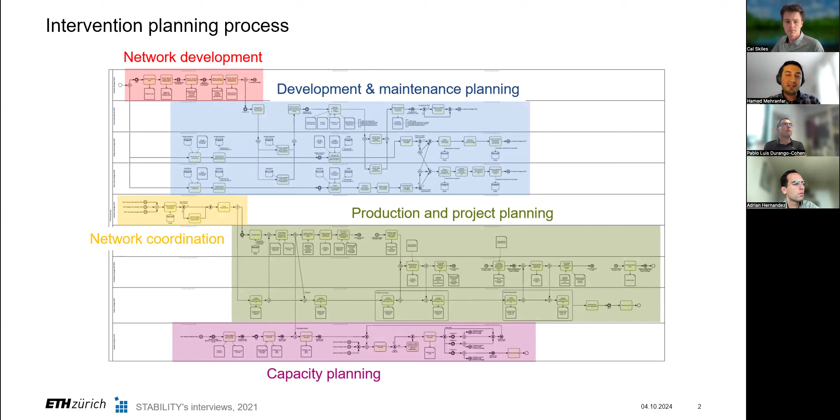So the suggestion would be something like this. You see the optimal composition, and you see, okay, at this point, I need to do this thing. And it's on purpose that I put it below so that you can see how you situate it over time. Different reads can be done from this, depending on the stakeholder.

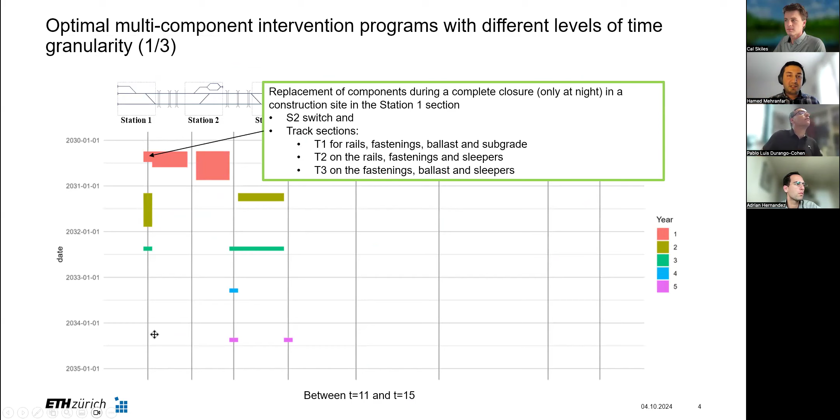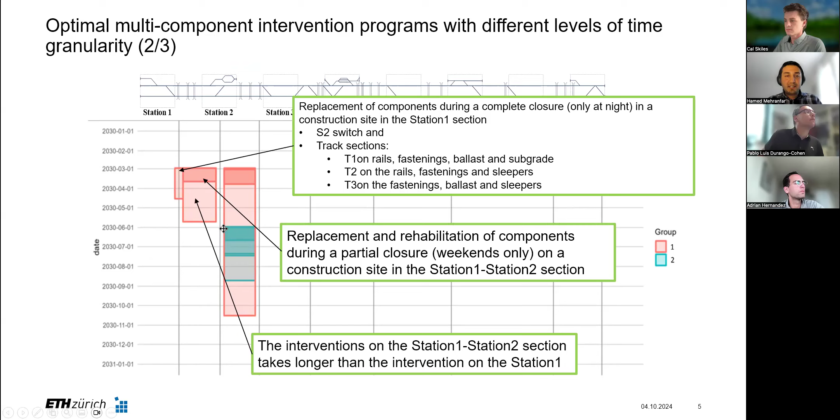For example, if you are a higher level manager, you might just want to know the spatial temporal overview of this intervention. You can zoom more in and see, okay, between this station, this kind of intervention needs to be done. Or you can even zoom more in and have it overlaid with the timetable, and then see where my closures are, what the services are here, and how they impact this. So we wanted to provide these things as efficiently as possible so that this kind of decision can be made fast.

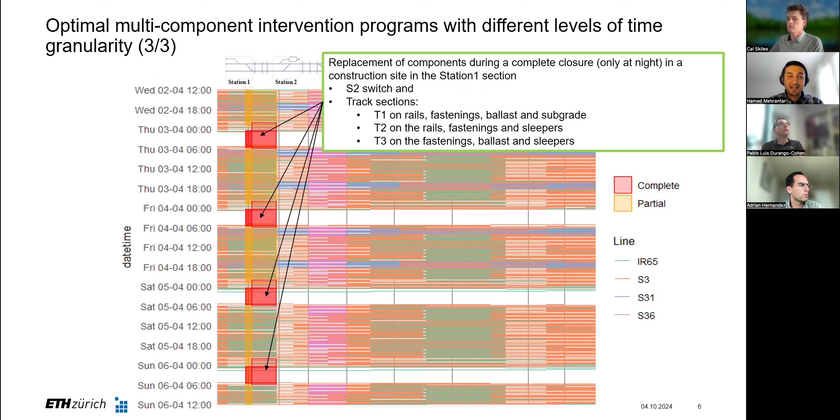So to give you a sense of what kind of information these decision makers deal with, these are, for example, results of the analysis from engineering offices. For example, they can say, okay, for this bridge, for its abutment, we need a rehabilitation that takes roughly 2 weeks, of which for 1 week it impacts traffic, and it more or less costs this much. So you have these things, you know where they are located, and this kind of decision can be made.

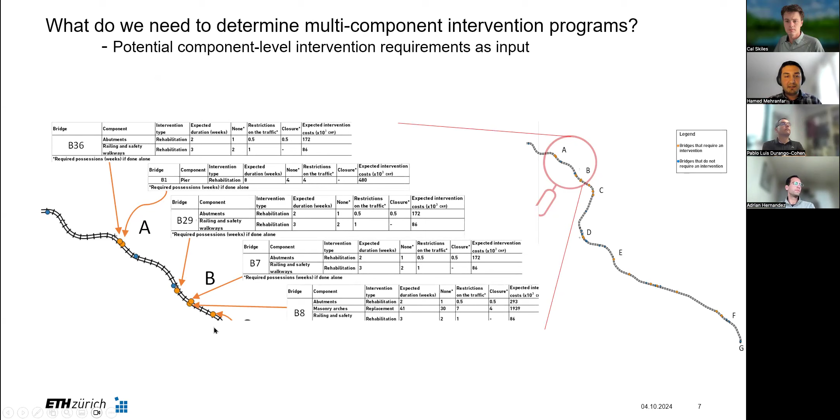So we wanted to be as close as possible to the way these managers think, and we wanted to make our cost function depending on that. So we consider our cost as owner cost, basically the intervention cost for the material and crew, traffic management costs for establishing the rerouting or shuttle buses, and service disruption costs that we counted as added travel time.

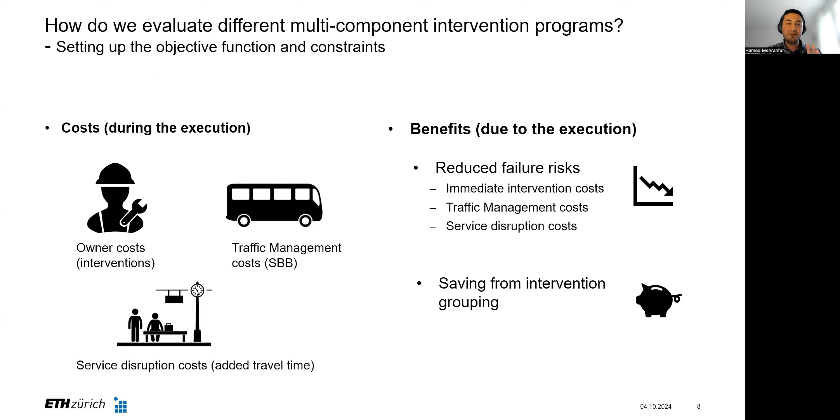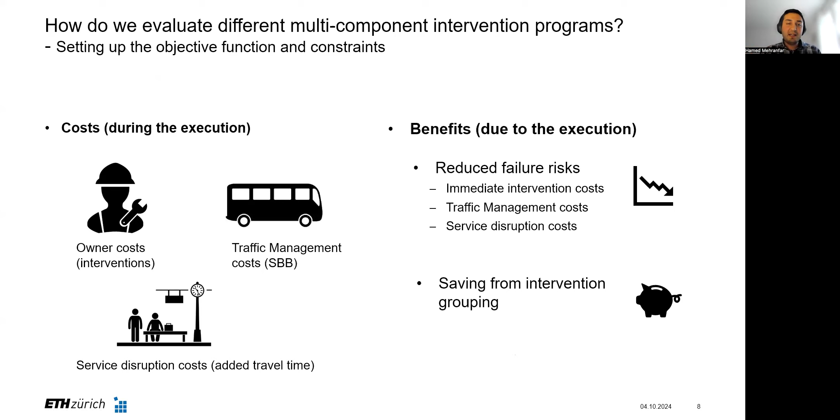And we have the benefit in terms of reduced failure risk. So we consider the level of failure risk at the time of execution compared to the worst possible failure risk that each one of the assets can have. And of course, we consider the saving from intervention grouping, because if you do interventions on components of the same type, usually there is an economy of scale, so we can share those fixed costs between these things.

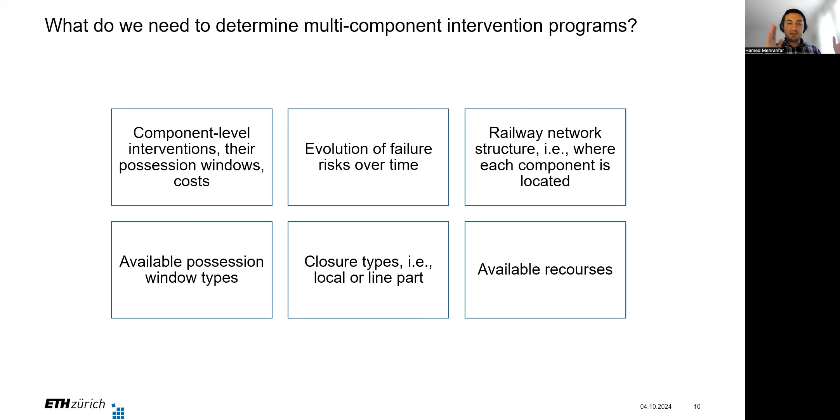And we need to know the structure of our network in order to locate them and make these interdependencies. And also we need to know the availability of our possession time and different types of closure if you want to close certain parts of the network or some bigger chunk of that network, and also the resources. So here is the way we did that. For example, we have a rehabilitation of the rails here, and the rehabilitation of sleepers here. So we consider an assignment graph for making these intervention programs.

We assume each intervention can be either done individually or within a group if they are near each other. So for example, this is the binary arc. If it is 1, it means this connection is established. If it is 0, it means it is not established. So we say this is 1, so this intervention is selected and it goes to the sink if it is being done individually. However, if it is to be grouped with the other one, with the sleeper, this is 1, this is 1, this is 1, so this chain is activated, and these two are selected to be done within the group.

Similarly, for structural dependency, here we consider these two: if this needs to be activated, it cannot be started because there is no incoming arc from the source. It cannot be started without the start of the one before. So if you want to replace this part, you have to also dig out this ballast and do the intervention. Similar here as well. When these are activated and selected, they activate a counterpart node in the other layer that we call the network layer. And this takes the duration of the intervention into account.

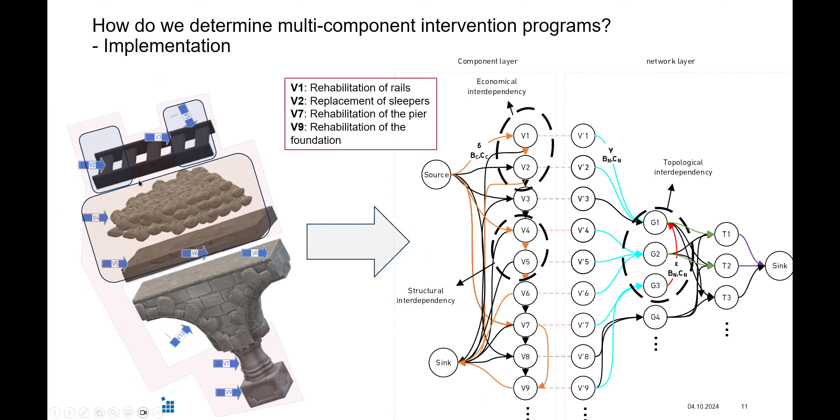So we said this went to this group, so the maximum duration will be the time of this group node. Similarly here, for example, when we do the intervention on the abutment and also on top of this bridge, they can be done more or less at the same time. So their groups can be merged together to form a bigger group, and we consider the saving in time with this epsilon here. Later on, they will be assigned to the different types of possession time that we have, and it goes through everything and makes the whole loop. That's the way we do these things.

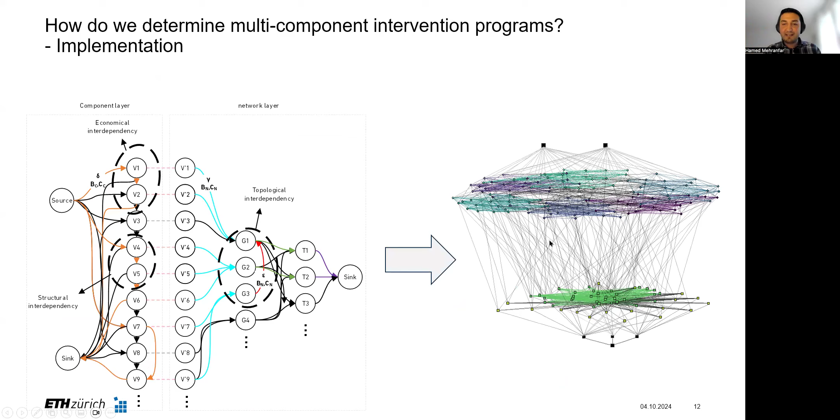So if we do that for a small-scale network, we get something busy like this. And to show the usefulness of this method, we compare the situation where you consider all of these interdependencies with the situation where you have none of them, which is basically a very exaggerated version where the infrastructure managers are negligent. They don't see any of these interdependencies and say, okay, we have to do all of these interventions separately.

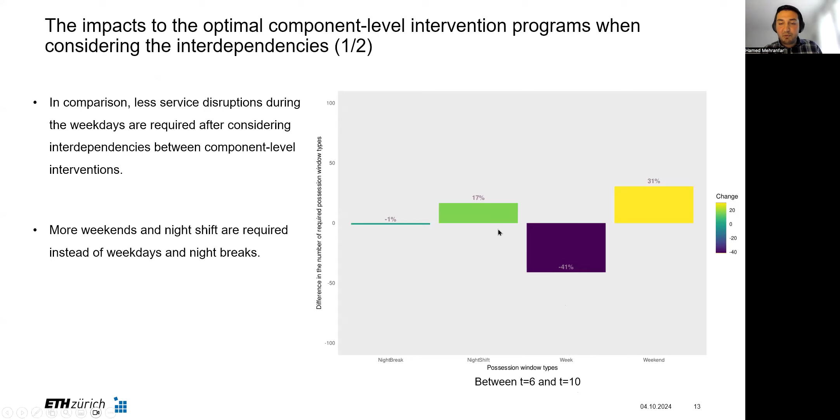So of course they consider some of them, but we just wanted to show these basically extreme. So when we consider one planning period between year 6 and 10, we saw, as we expected, that when we consider the interdependency between interventions, we see a reduction in the possession time requirement during the week, which is the more expensive type of possession window, in favor of having more on the night shift and weekends.

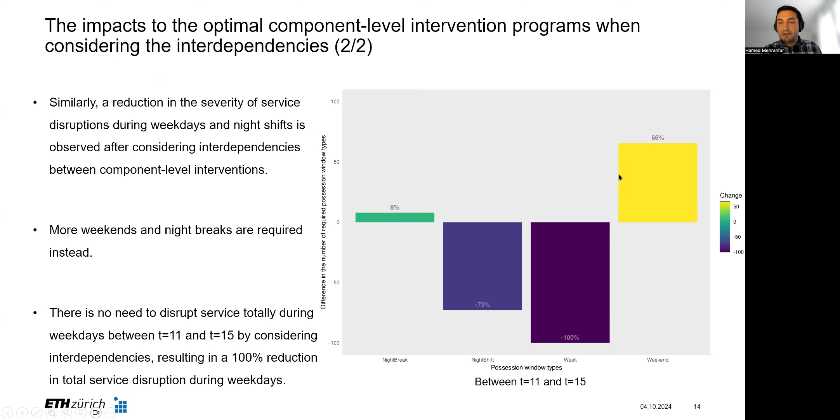Similarly, for the other planning period, 11 to 15, we also saw this drop in more expensive possession windows in favor of having more on the cheaper possession. And then considering also the cost and net benefit, we also saw in both of these planning periods a reduction in cost and improvement in the total benefit, which made us very happy.

So yeah, just to conclude, this methodology is versatile. You can have this same construction for any other network. However, it could be a bit more tricky. For example, for the road, you need to consider a traffic model for the user costs and stuff like that, which is easier if you consider rail because you have basically a timetable and then you can see how it's being done.

And the most important part is that this model can consider the interdependency between these component-level interventions. It can consider the failure risk and different types of possession windows to establish the optimal trade-off between these costs and benefits within different planning periods.

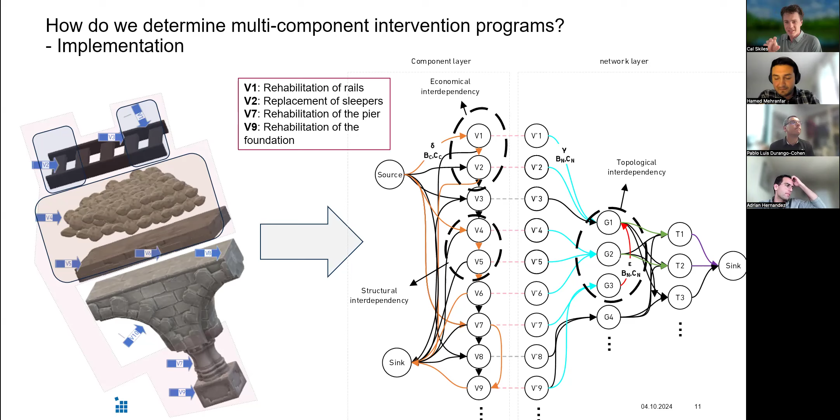Hamed, I think on the previous slide it was mentioning the different types of interdependencies. My first thought was that the economical interdependencies and the topological interdependencies could be the same or very similar. I was wondering if that became an issue, or is that slide saying they're two different things, where one's component level and one's group level? That's an excellent question, actually. So it might look the same.

However, for economical dependency, we only define them for components associated with assets of the same type. So for example, if you have a switch here, you should have another switch, because when the works are being done together, you cannot assign the group doing the maintenance of a bridge to the switch, because they are different kinds of people, so it's a different cost. That's why in the economical dependency, we consider the reduction in the fixed cost. However, in the topological dependency, we only have the reduction in the user cost, because it has to do with the time that is required. Thank you. That's super helpful. Thanks.